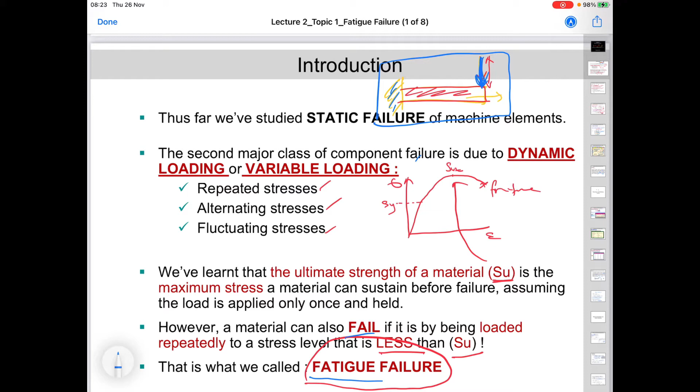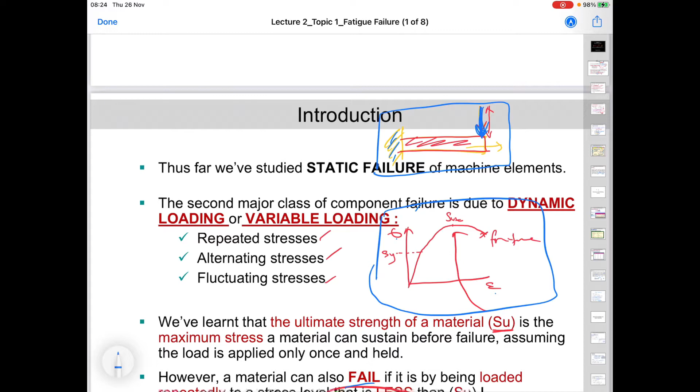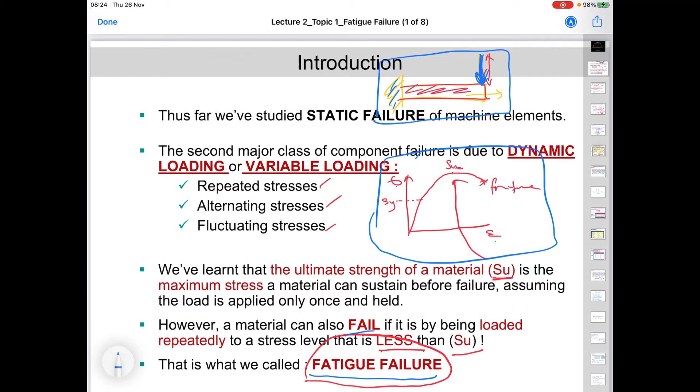Remember this figure. You have stress and strain, and whenever we do the testing, we see that the stress is getting higher, and there is yield strength, there is ultimate tensile strength. Usually after the ultimate tensile strength, the material only fails after that point. But in variable loading, failure may occur before the ultimate tensile strength, meaning somewhere here.

Fatigue is a relatively new study or new field in engineering materials.

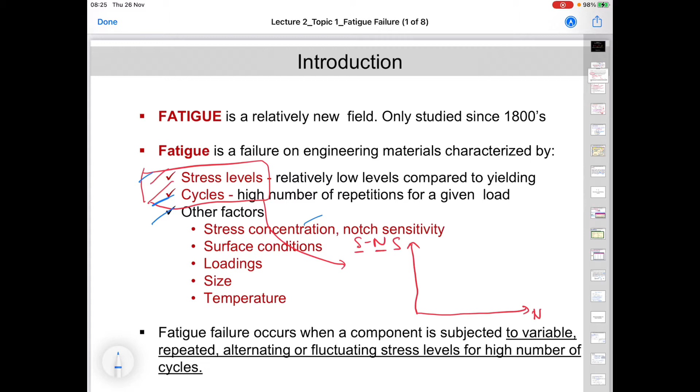Fatigue can be categorized due to a few factors, for example stress level. If the stress is high or low, it will contribute to different yielding strength. Then the number of cycles, either high cycles or low cycles, meaning a high number of repetitions of load given to the material. Other factors include stress concentration, notch sensitivity, surface condition, loading size, and temperature.

This is an example of the fatigue failure phenomena. You can read about the 1981 flight, the Boeing 737-200 disaster, where the fuselage broke due to disintegration in the middle of the flight. That's very dangerous. Due to what? Due to the repeated load that occurred, and luckily only one person was killed.

And this one is very interesting. You may see this bicycle crank spider arm was broken and torn apart, broken right here, due to the variable load or dynamic loading.

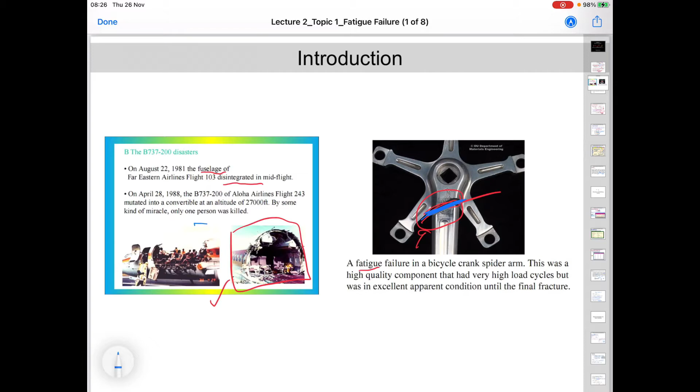Now, fatigue failure analysis approach. Sorry, because I've scribbled on these lecture notes I made before. So there are several approaches for fatigue failure analysis.

Either fatigue life methods, fatigue strength and endurance limit modifying factors, stress concentration, fluctuating stress, combination of loading modes, varying fluctuating stresses. You will see these several approaches in many textbooks, especially in the Shigley textbook.

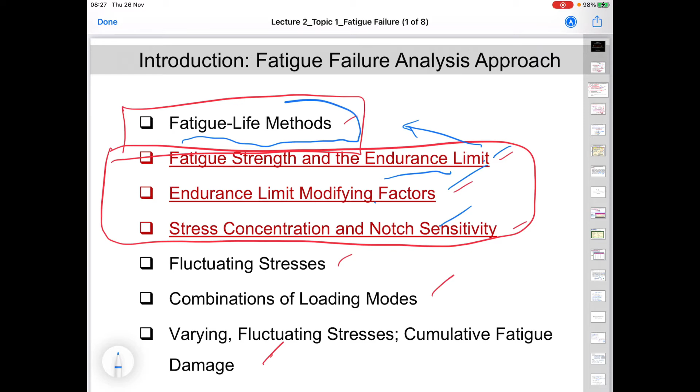But for our case, we will be covering mostly only these three: fatigue strength, endurance limit, and also the modification of the endurance limit, and then stress concentration. And definitely part of them will use fatigue life methods to calculate the fatigue strength and also number of cycles.

So, fatigue strength, endurance limit. In fatigue strength and endurance limit it's usually noted as Se, like this. Fatigue strength is usually denoted as Sf, fatigue strength. So these two symbols you may see a lot after this.

For steel, the relationship between the tensile strength and the endurance limit is given according to ultimate tensile strength. How can we get the ultimate tensile strength? Definitely from the textbook or from the catalog, in the Shigley book it's there. Let's say you have steel with a specific condition, AISI 1060 or whatsoever, and your ultimate tensile strength when you check in the catalog, let's say less than 1400 megapascal, you will use 0.5 times ultimate tensile strength, then you can get the endurance limit.

Be careful with the prime notation here. The prime symbol at the top of S is referring to the rotating beam specimen, the endurance limit of the rotating beam.

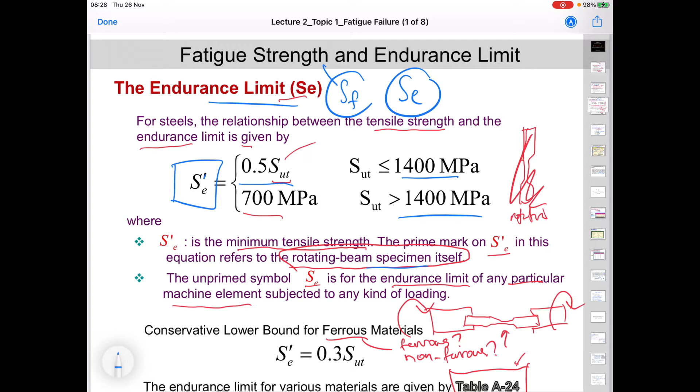Conservatively, for the ferrous material, for the conservative lower bound, you may ignore this first, but whenever they say ferrous metals with specific things, you can use this equation. But have a look at what is ferrous and what is non-ferrous. Endurance limit can be found in table A24.

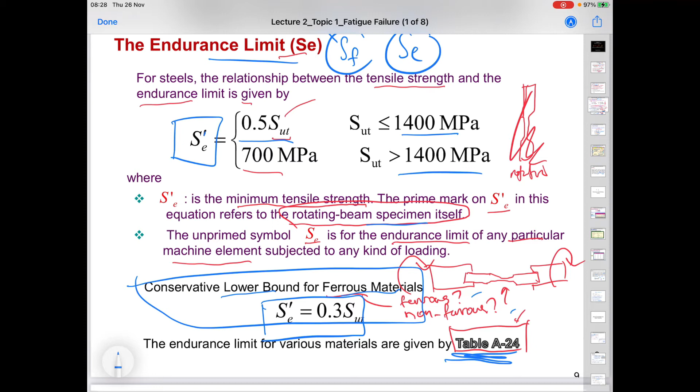Fatigue strength, as I mentioned, is the criteria to show the fatigue strength of the material according to number of cycles. So fatigue strength originally is the ultimate tensile strength. If there's no load at all, cycles don't even begin, number of cycles hasn't started, so the strength of the material is the ultimate strength. However, when you put a load, because the load is repeated and alternating, it becomes cyclic.

Cycle 1 has one load, cycle 2 has one load, meaning in cycle 1 you put the load then release, in cycle 2 you put the load again then release. So the number of cycles makes the strength of the material get lower. So it's no longer called ultimate tensile strength, it's called fatigue strength.

Because of that, fatigue strength can be categorized as low cycle fatigue or high cycle fatigue. Low cycle fatigue is where the fatigue strength is slightly lower than the ultimate tensile strength. I will show you the graph after this.

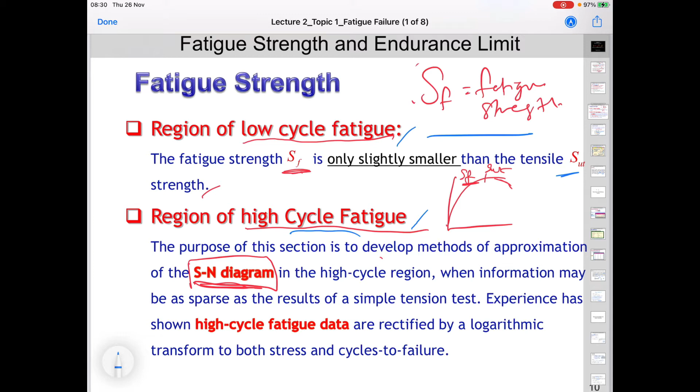In high cycle fatigue, when the cycles are given many times, you will see a trend showing the fatigue strength of the material decrease gradually according to number of cycles. So before that, ultimate tensile strength for specific materials, for example like steel and cast iron, have specific equations that we have to follow.

Equal to ultimate tensile strength for steel, 3.41 times HB. So HB is what? HB is either the correction factor or the variable that is usually given. This one is based on the standard SAE approximation.

So this one, true stress value, sigma prime F, equal to ultimate tensile strength plus 345 megapascal. This equation we can also assume if we don't have enough information, for example if we don't know what is its true stress value, we can use this equation as well.

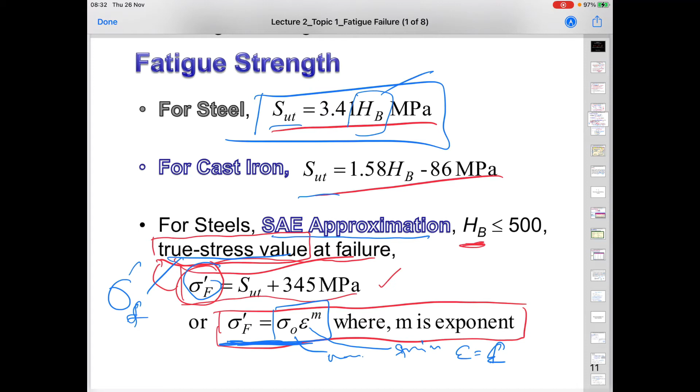This is stress, normal stress, any stress based on the condition of the specimen. E here is strain. So strain here could be strain at failure also, like this one. M is the variable exponent.

So fatigue strength, this equation is very important: SF equal to A times N power of B. SF is the fatigue strength, A is a variable, N is number of cycles, B is also a variable. You may see this equation a lot whenever we want to know what is the fatigue strength of the material at a specific cycle, then we use this one.

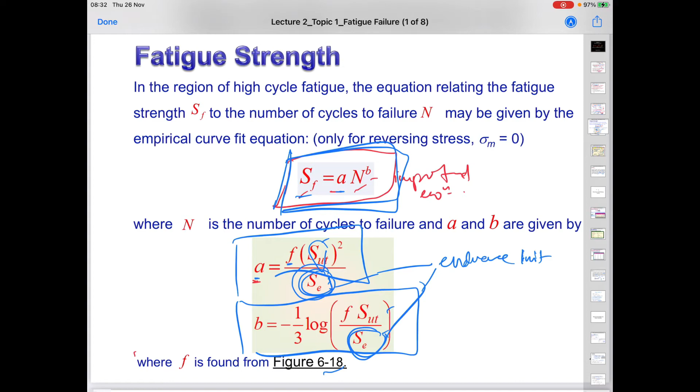You see A equal to F times SUT, ultimate tensile strength, power of 2, SE. SE, don't know yet, SE for both A and B is the endurance limit that we have to know. F, I forgot, F is the fraction

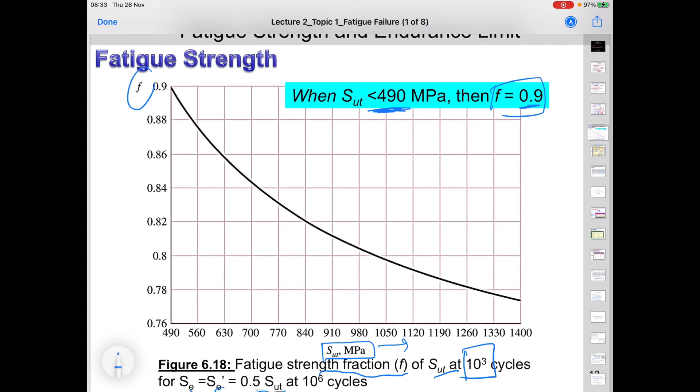of fatigue strength. So you see, if ultimate tensile strength is higher, the fraction gets lower, they're going down. That's why they say whenever ultimate tensile strength is less than 490 megapascal, then F equal to 0.9, then you can get directly the F.

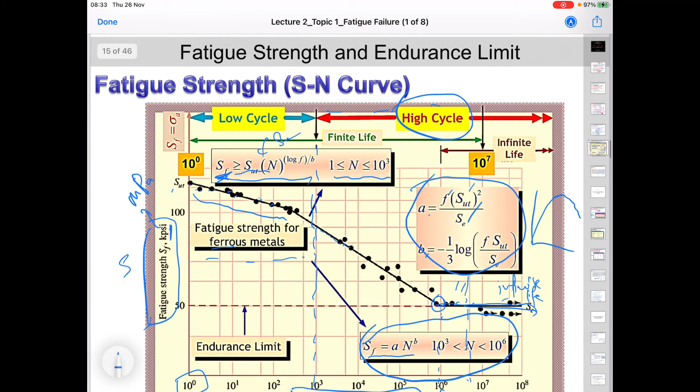So this is the SN curve. The SN curve is very interesting. S refers to fatigue strength. Don't worry about the unit in this figure, because this one is for English unit. Ours is usually SI unit, so it should be megapascal. But don't worry, the graph, the pattern, the curve, for all the materials in this picture is exactly the same.

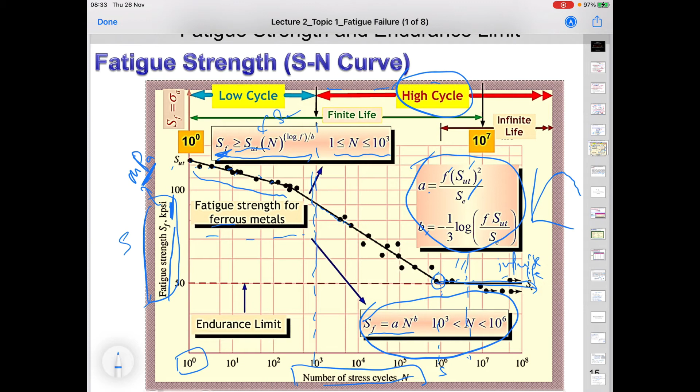So number of stress and fatigue strength - x-axis is number of stress, y-axis is fatigue strength. Then you see low cycle region, high cycle region. Remember earlier, the category of fatigue strength has low cycle and high cycle, right? During low cycle, you see without load at the original point where there's no load.

Kalau ada load sekalipun tapi tak ada cycle, itu ultimate tensile strength, kan? So material ni dia punya fatigue strength is equal to ultimate tensile strength.

However, when you apply load and then the load is repeated, and then you have number of cycles, stress cycle, ultimate tensile strength is no longer maintained, and it's decreasing gradually. Then we no longer call it ultimate tensile strength. We call the material strength as fatigue strength.

Ni dot hitam ni, kan, fatigue strength. In the low cycle, the equation that we use is this one. Low cycle ni macam mana? Low cycle ni between tak ada cycle sehinggalah kepada 10 power of 3. Kalau more than 10 power of 3, kita guna this equation.

Okay, so definitely A and B is taken from this one. Alright, so you may see from 0 cycle until around between 10^6 to 10 power 7, we call as finite life, meaning it will decrease until finally dia tak boleh hidup dah. Kita nampak dia walaupun kita bagi cycle lebih, itu sahajalah the final one, then that's the end of the fatigue strength decreasing.

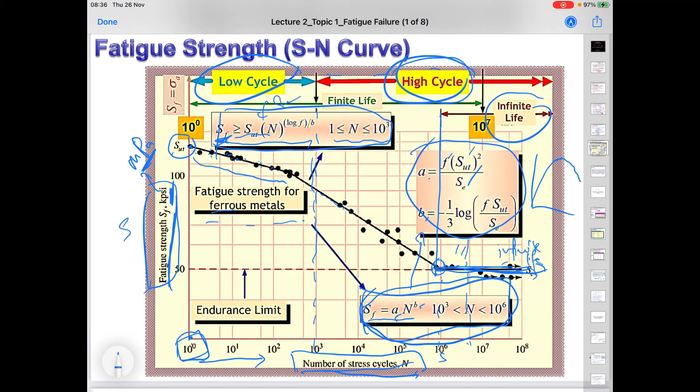Then you will see that according to this area, infinite life ni, kat sini ke sini, equal to the endurance limit, the maximum endurance limit.

So this is the summary of fatigue strength. Please have a look how to get B, and then how to get this one. NE is equal to 10 power of 6, which is endurance number of cycles.

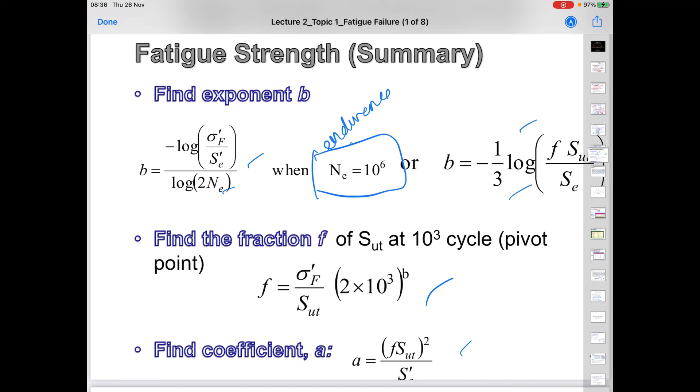Endurance number of cycle. Okay, so fraction, we get the A, SF equal to this one.

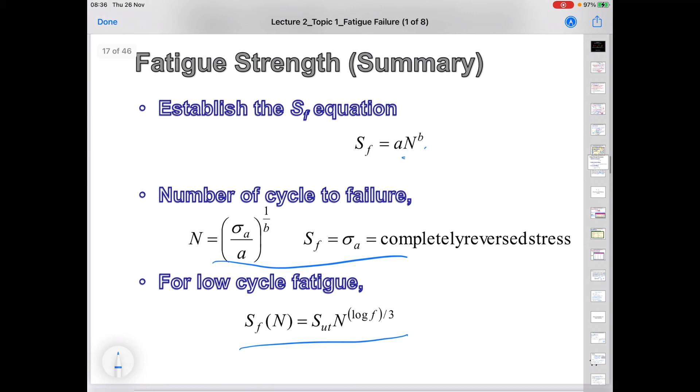Okay, we try this example, fatigue strength and endurance limit. Estimate the fatigue strength of rotating beam. Dia kata rotating, definitely dia adalah variable loading.

AISI 1020 HR steel corresponding to a life of 12.5 kilocycles of stress reversal. Also estimate the life of the specimen corresponding to a stress amplitude of 252 megapascal. Known properties, ultimate tensile strength.

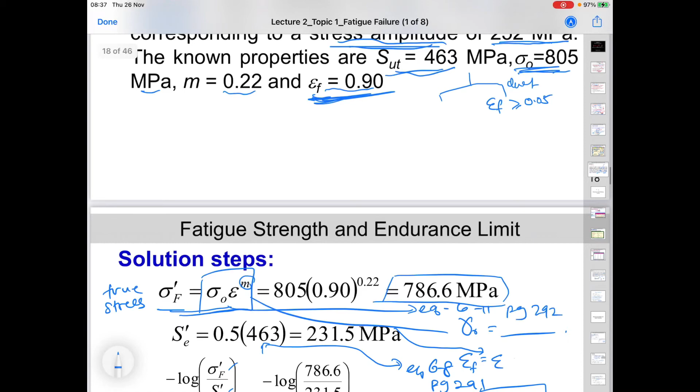Ni kalau tak bagi tahu kita kena carilah. True stress 805 megapascal, exponent M 0.22, strain at failure 0.9. So given to us, this is N and apa lagi?

Alright. So first thing first, what we have to do is we get the true stress first. True stress, fatigue true stress, fatigue true stress.

Okay, I hope you're not messy here, you will not get confused. I just want to highlight here. So fatigue true stress is equal to stress given in the question times strain power of M. So you may read further in page 292.

Page 292, equation 6.11. And then you will get apa tu? Sebenarnya they have assumption that strain at failure is equal to strain. Then you can get directly 0.9.

Power of M given 0.22, and then stress is 805. Where is it? This one, 805 megapascal and 0.9. You get the value. Endurance limit of the rotating beam.

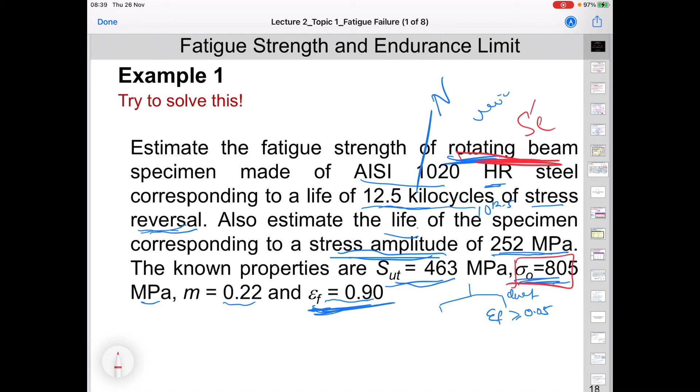Remember dia kata rotating beam kan? Ni rotating beam. So this one we can get this one, endurance limit is 0.5 times 463 equal to 231.5. Ini kat mana pula ni? Ini because your ultimate tensile strength is 463, which is less than berapa tadi, 1400 megapascal, right? So S prime E is equal to 0.5 SUT. So you get this one.

And then you calculate B. You put the fatigue true stress, you put the endurance limit of the rotating beam, you put the endurance limit number, cycle number, and then you can get B. How can they put NE equal to 10 power of 6?

This one is ideal number of cycle for material. So usually 10 power of 6. So you just put 10 power of 6, although it's not given in the question. And then you calculate F. The same thing, you calculate A. And then you put everything in this one.

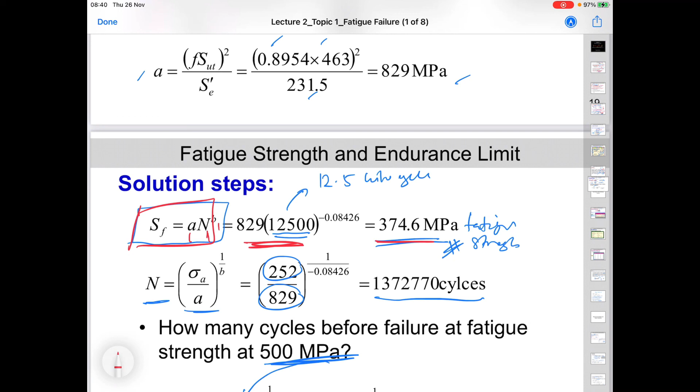Kan kita dah ada A, kita dah ada B, kita dah ada N. Then you get the fatigue strength. This one, fatigue strength. And then you calculate N, sigma A over A, power of 1 over B. Then you get number of cycles.

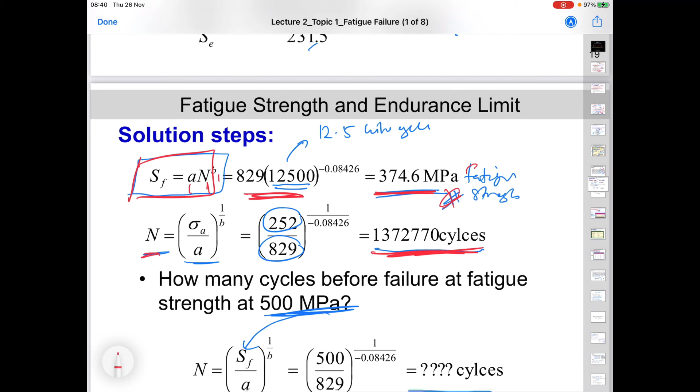So how many cycles before failure at fatigue strength at 500 megapascal? Senang je lah ni. So you just replace fatigue strength 500 megapascal dalam ni, then you get the number of cycle.